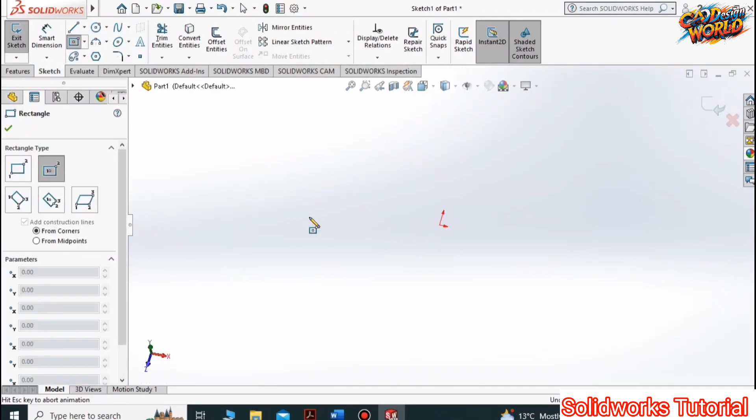First, I'll start a new sketch by selecting the Center Rectangle tool. I'll place this sketch on the top plane, starting from the origin to draw the rectangle. Now, using Smart Dimension, I'll set the width to 38 millimeters and the height to 56 millimeters.

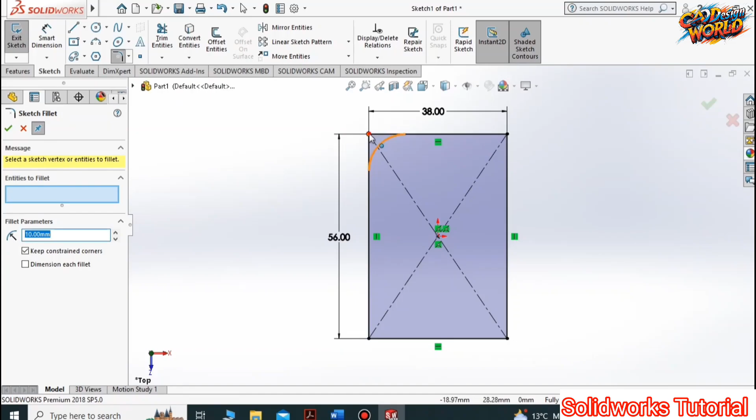The next step is to add some fillets. I'll select the Sketch Fillet tool and apply it to the two corners on the left side with a radius of 10 millimeters. Now I'll add some circles, drawing one up here and another down here.

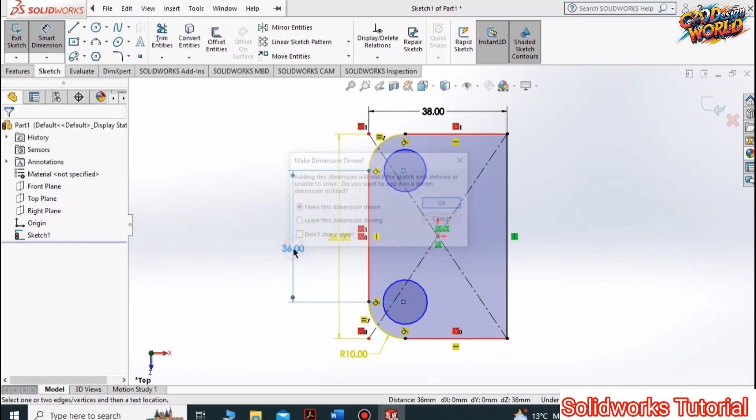To position them correctly, I'll try to add a dimension. Notice this message, 'Make dimension driven?' This means the sketch would become over-defined if I add this dimension. This is a common mistake. The better way is to use relations, so I'll cancel that.

The correct solution is to make the circle concentric with the arc. I'll do the same for the bottom circle. Then I'll select both circle centers and add a vertical relation between them. Now all I need to do is define the diameter, which will be 10 millimeters for each circle.

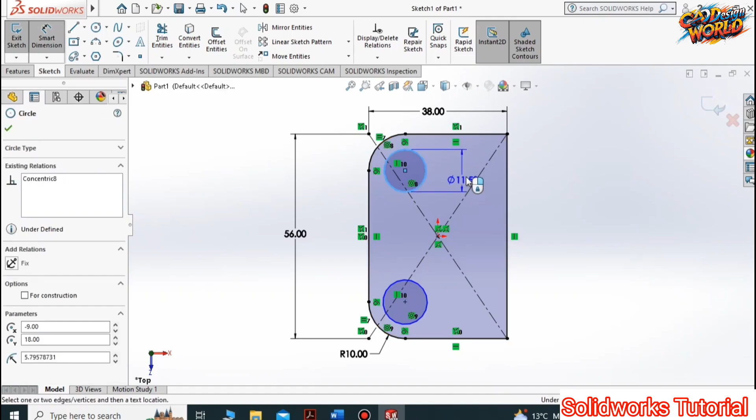I made a mistake here. I entered 20. We correct the value by clicking on it twice. We enter 5 millimeters for the two circles, then correct it again to 10 millimeters as the diameter of the two circles.

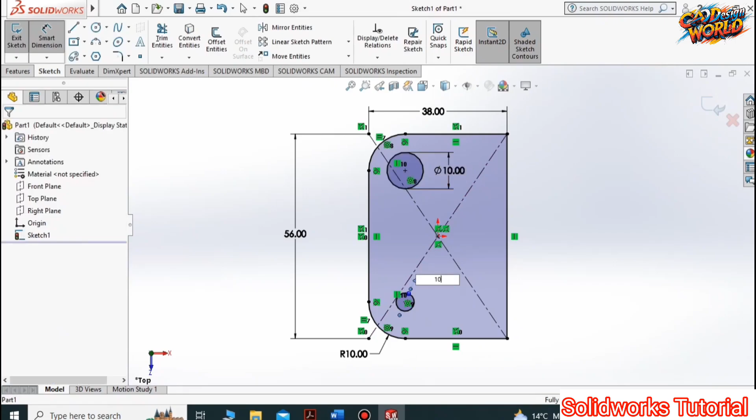Now that the sketch is complete, I'll go to the Features tab and select Extruded Boss Base to create an extrusion with a depth of 8 millimeters.

Next, I'm going to make a cut. I'll select this side face and start a new sketch, drawing a rectangle here in the corner with dimensions of 4 millimeters by 8 millimeters.

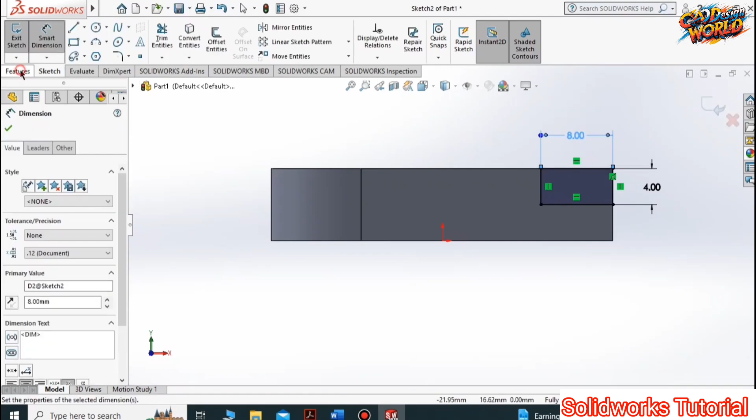Then I'll use Extruded Cut, and from the options I'll select Through All, so the cut goes through the entire body.

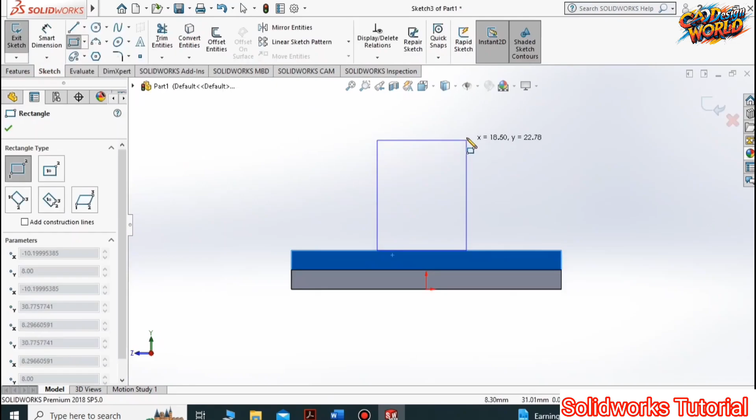Now, on the top surface, I'll add another feature. I'll sketch a rectangle and then use a 3-point arc to draw an arc on top. With the Trim tool, I'll remove the top line of the rectangle, and make the arc tangent to the side lines.

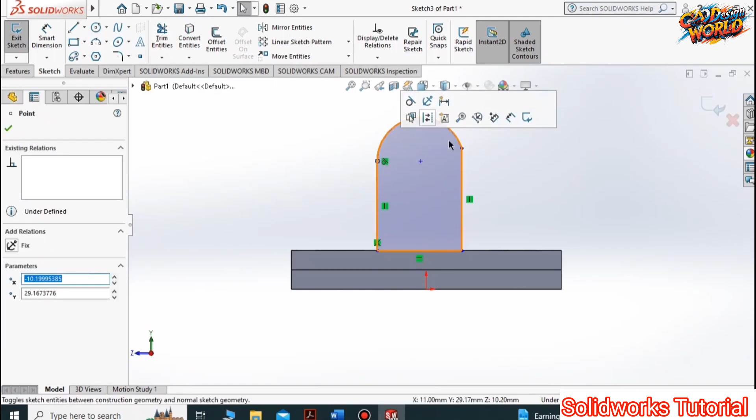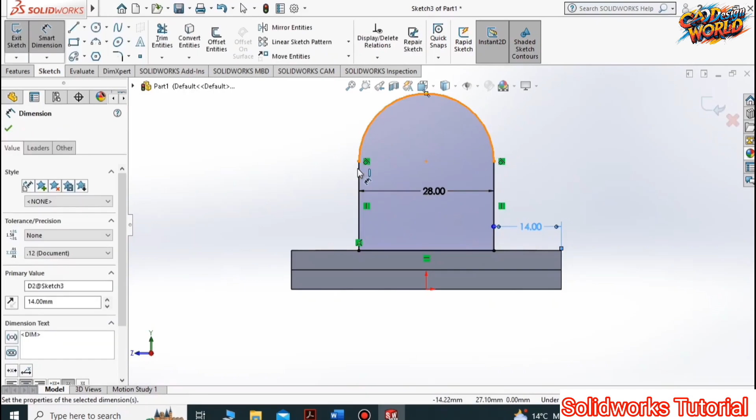I'll set the width to 28 millimeters, the height of the straight section to 14 millimeters, and the total height to 34 millimeters. Mistake again—correcting it to 34 millimeters.

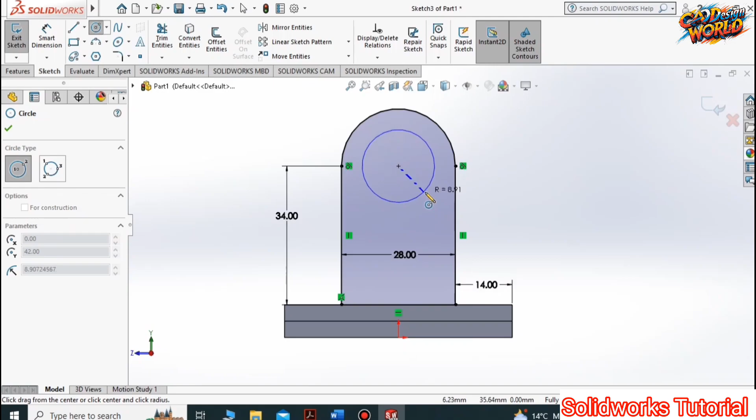After that, I'll draw a circle in the middle with a diameter of 10 millimeters. I'll go back to Features and extrude this profile for a distance of 8 millimeters.

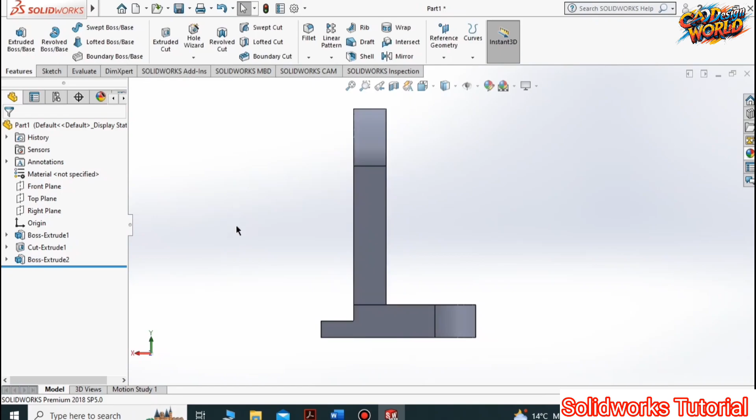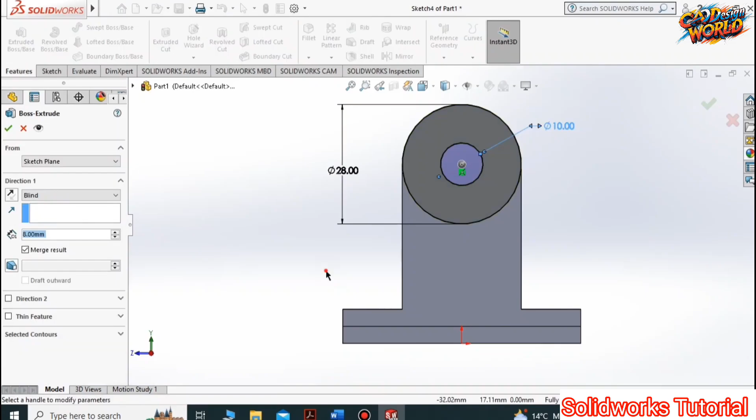Now I will draw two circles from the center of the extruded circle. The first has a diameter of 28 millimeters, and the second has a diameter of 10 millimeters. I'll go back to Features and extrude this profile for a distance of 8 millimeters.

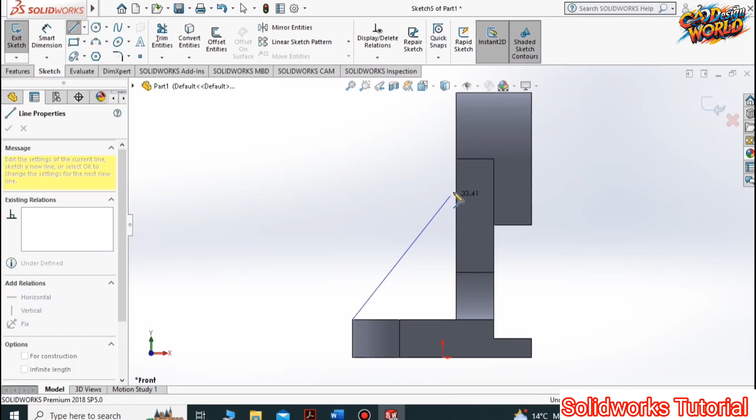To strengthen the design, I'll add a rib. I'll sketch on the front plane and draw a single diagonal line connecting the edge to the base. Then I'll select the Rib command and set the thickness to 10 millimeters. I'll click OK.

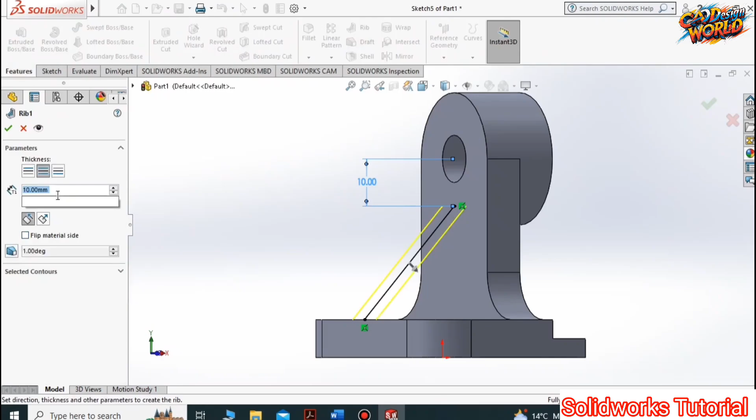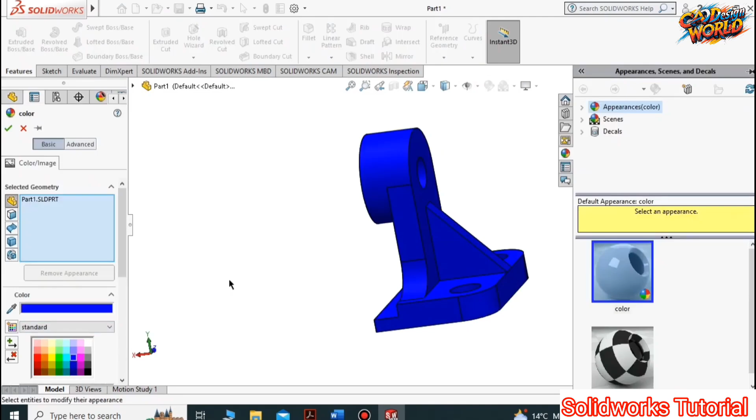Finally, I'll add a fillet to the bottom edges of the rib to smooth them out, and I'll change the color of the model from the Appearances menu. I'll save this part.

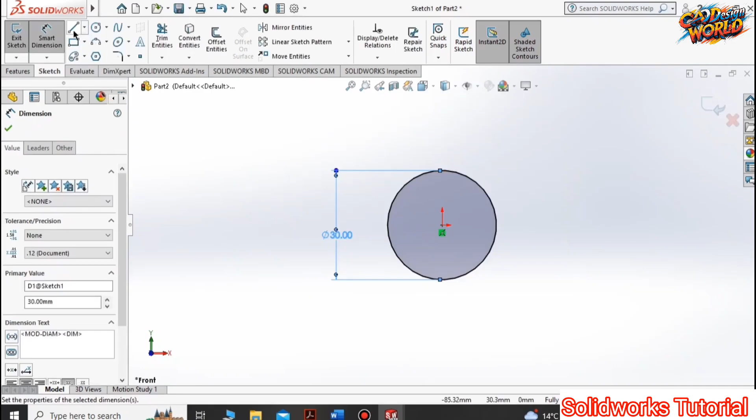Now I'll design a new part, bushing. I'll start sketching on the front plane and draw two circles. The outer diameter is 30 millimeters and the inner diameter is 12 millimeters. I'll extrude them to a depth of 6 millimeters.

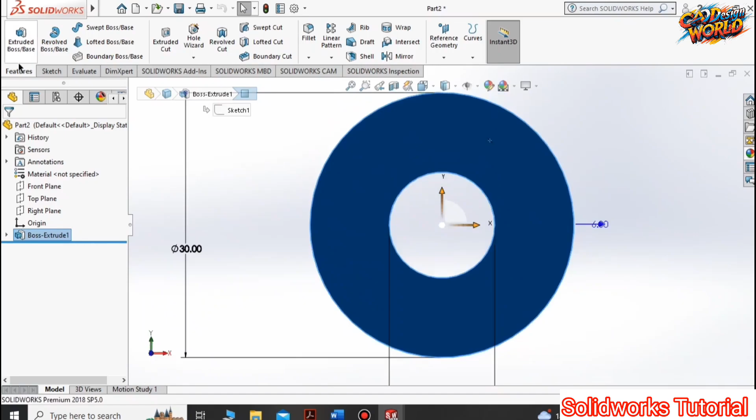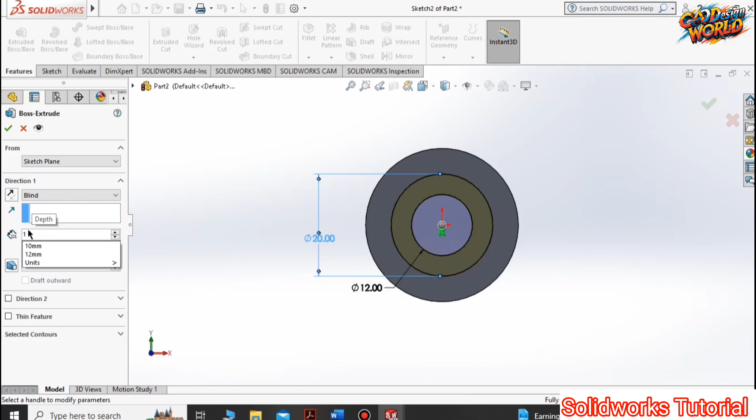On this face, I'll start a new sketch. I'll draw two more circles with diameters of 20 millimeters and 12 millimeters. I will then extrude this new profile to a depth of 14 millimeters.

Then save the part bushing to device. To give the part a realistic property, I'll apply a material from the material list. I'll choose aluminum alloys. As you can see, we've finished designing both parts.

And with that, we have finished designing both the bracket and the bushing. We now have all the necessary components for our project. Join us in the next video where we will assemble these parts together to create the final belt roller support.